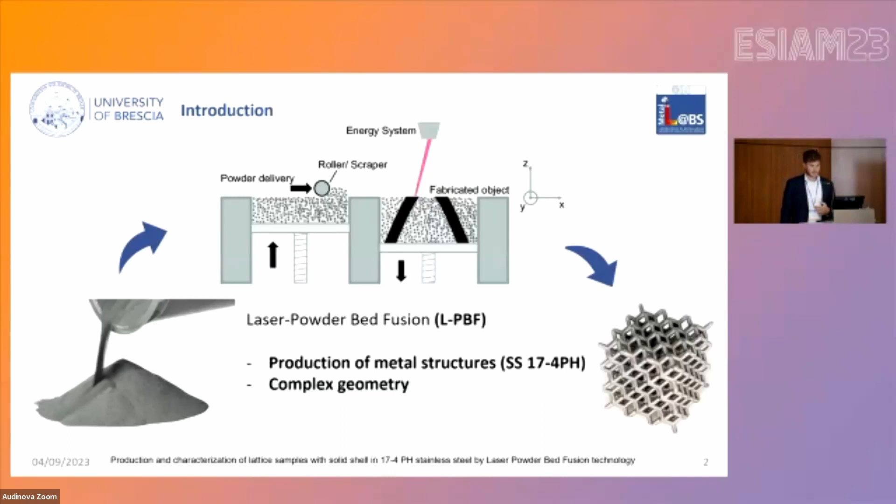This kind of technology is also perfect to build complex geometries such as lattice structures. The lattice structure, in fact, is an interesting solution for several fields: aerospace, biomedical, mechanical, and so on, due to its excellent properties, in particular lightweight, high strength and stiffness, heat dissipation, and shock absorption.

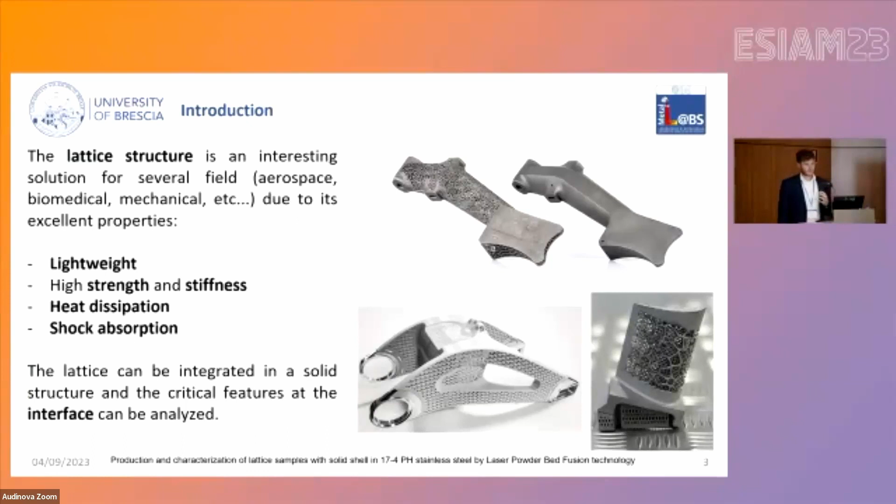But the lattice will be inserted in a solid component, and the key point of my work is to study the interaction between the lattice part and the solid part. So I want to understand what happens at the interface between these two different dense parts. Let's start to see the technology.

We use the ProX 100 by 3D Systems, and we use the process parameters that you can see here in the first table. In particular, we set the power to 100 watts and a scanning speed of 300 millimeters per second. Another important thing is the building chamber, which we fill with nitrogen.

This is really important for the inert atmosphere, not only for the oxidation, but also for the microstructure of the built component, because it's not the only gas that we can use with this kind of technology. The chemical composition of the powder is also reported here in the second table.

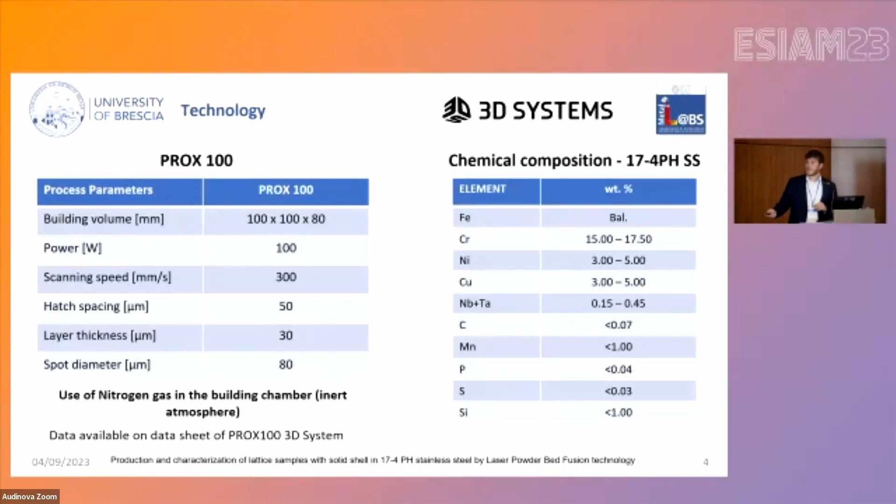For the design of the sample, we decided to print a basic geometry, a square-based sample with a length of 22 millimeters and a height of 20 millimeters, with a shell thickness of 1 millimeter for the solid part. Instead, for the lattice part, we applied an FCC unit cell of 5 millimeters cube in volume, connected with cylindrical struts and with spherical node connections.

After that, we analyzed in particular the microstructure and the defects of heat-treated samples and as-built samples. The treatment was performed as solution treatment plus aging treatment. After that, we also performed the compression test to understand the mechanical characteristics of this element.

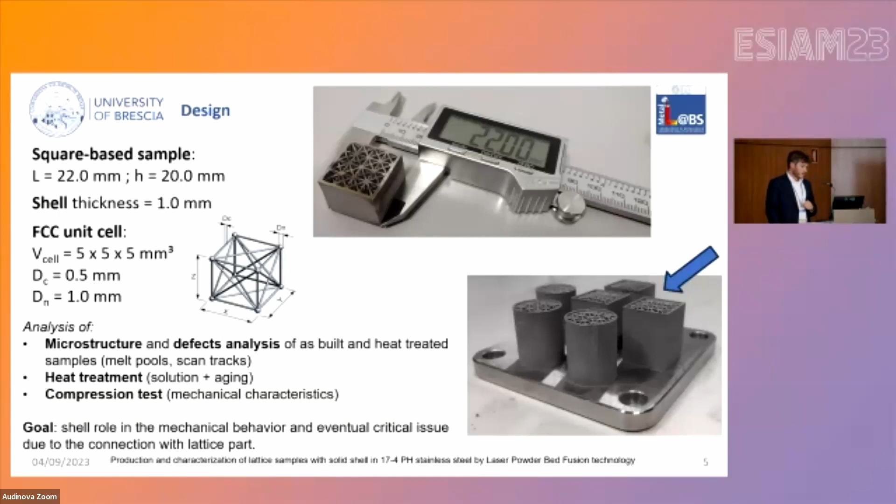The goal, as I said before, was to understand the role of the shell on the mechanical behavior and eventual critical issues at the interface due to the connection of the lattice part to the solid part. Let's start to understand what happened with this interaction. As we said at the beginning, after the production of the sample, we looked for the critical issues.

In particular, the presence of porosity can be noted here and also here, but it is also important to see that we don't have a perfect spherical node here, but a sort of distortion of the geometry. But this is normal because we pass from the small size of the strut to the higher dimension of the solid shell. After this first analysis, we also performed the heat treatment.

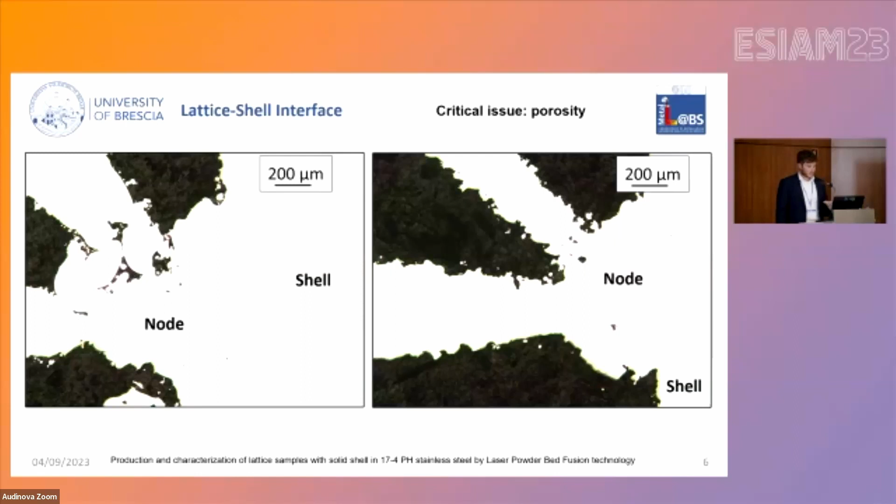The treatment started with a solution treatment at T1 of 1040 degrees for 1 hour, followed by an aging treatment at T2 of 480 degrees for 4 hours. This was conducted in argon atmosphere, including the cooling, to avoid the oxidation of the sample as much as possible.

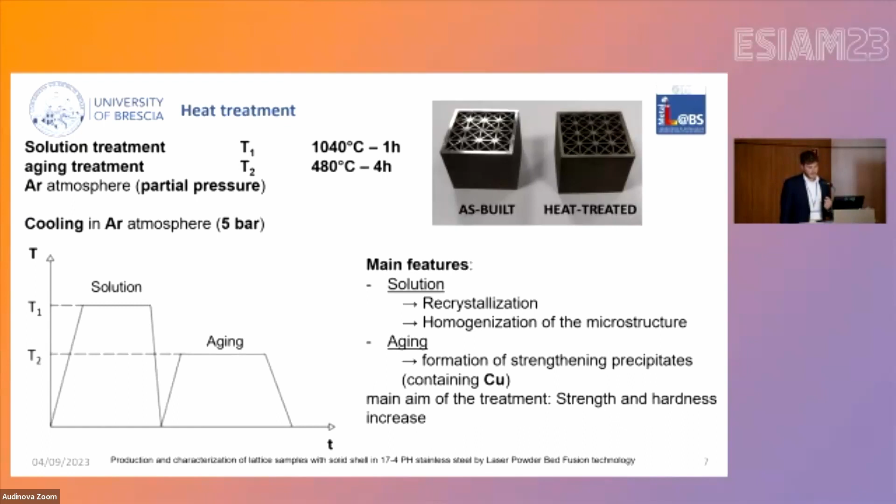The main purpose of the solution treatment was the recrystallization and homogenization of the microstructure, as is widely explained in literature, and of the aging the formation of strengthening precipitates, in particular copper-containing precipitates. The main aim of the treatment was, in fact, to increase strength and hardness. So let's start with the analysis of the microstructure.

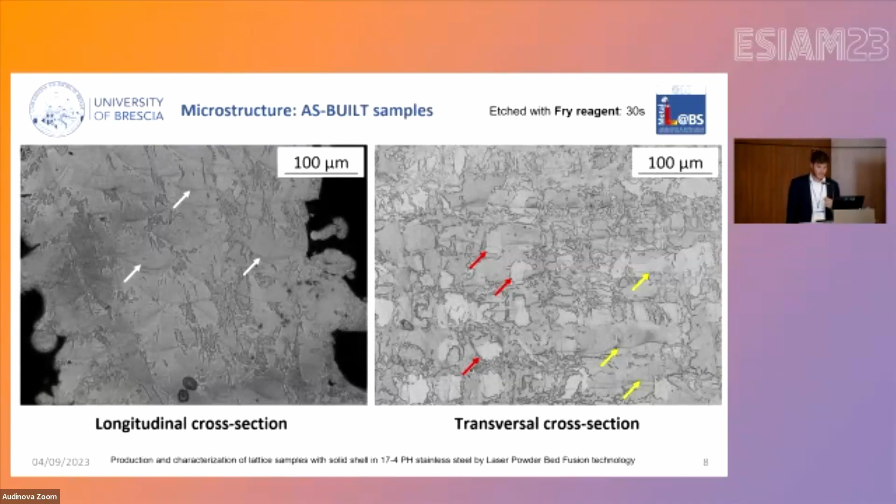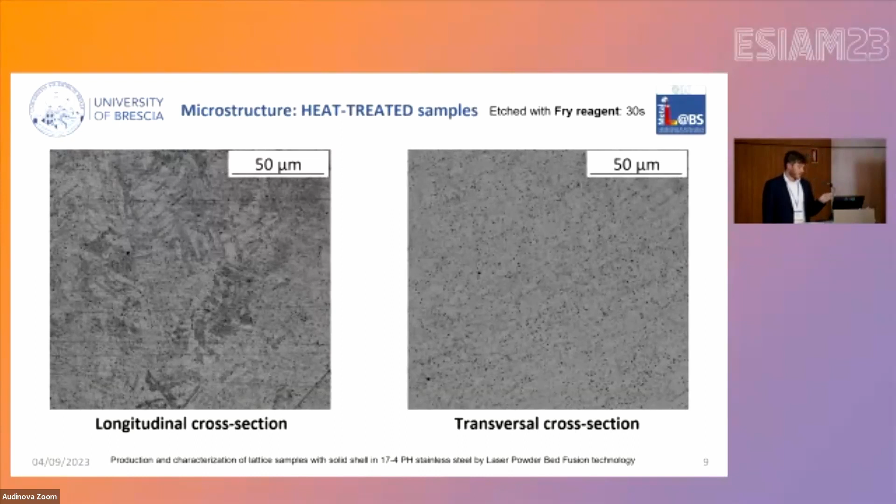After the heat treatment, we obtain another kind of microstructure. In fact, the primary microstructure with melt pools and scan tracks disappears, and precipitates appear that we can find along the grain boundaries and also inside the matrix. We decided to study this microstructure more deeply to understand which components are inside.

In the first picture, for the as-built, we can see three main zones, and we can detect a grain in AB1, a copper segregation in AB2 and the melt pool in AB3. The most important thing I want you to focus on is the copper segregation, because in particular we found this big area deposited on the bottom of the melt pool. This copper segregation is rich in copper. In fact, it presents 24% of copper.

Thanks to the heat treatment, this segregation solubilizes and promotes the nucleation of the copper. In fact, we can find in the second picture copper-rich precipitates. We analyzed, for example, one precipitate on the surface, and we found a higher amount of copper. In fact, we detected more or less 36% copper.

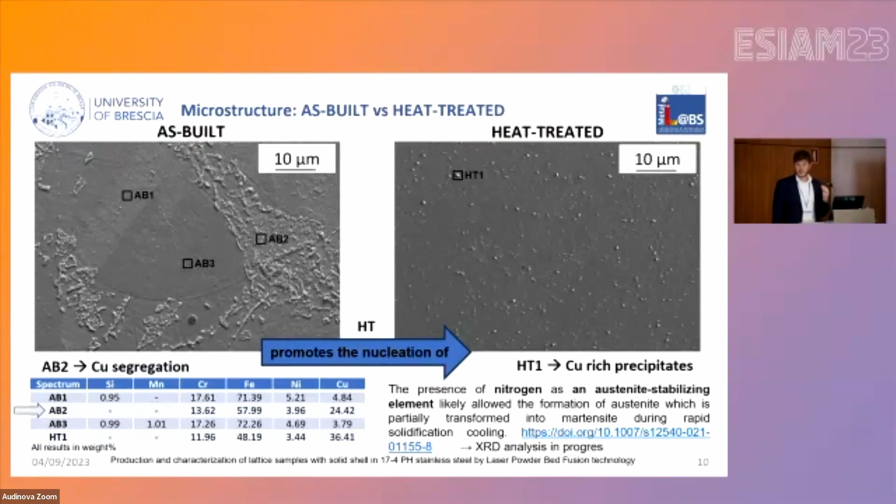Moreover, the presence of nitrogen, as I said before, as an austenite stabilizing element likely allowed the formation of austenite, which is partially transformed into martensite during rapid solidification cooling. And we are also performing the XRD analysis to understand which phases are present.

At the end, I also performed the mechanical characterization. We performed compression tests on the as-built and heat-treated samples, three for each kind of sample. We can appreciate that the two curves are different, because for the as-built we have a lower value of stress, and there is a sort of plateau when it reaches the peak of stress. While for the heat treatment, we obtain a higher strength, of course, and not a plateau, but a decrease in strength.

But the very important thing in this study was the deformation, because in this case we obtain a deformation of the shell that follows the compression. So we don't obtain a detachment of the shell like I obtained in another study for the titanium sample, as you can see in this picture, because there we applied the same compression test, but the lattice, the internal structure, expanded in the external direction and detached the solid shell from the structure. Instead, in the case of 17-4 PH, we obtain a deformation of the shell.

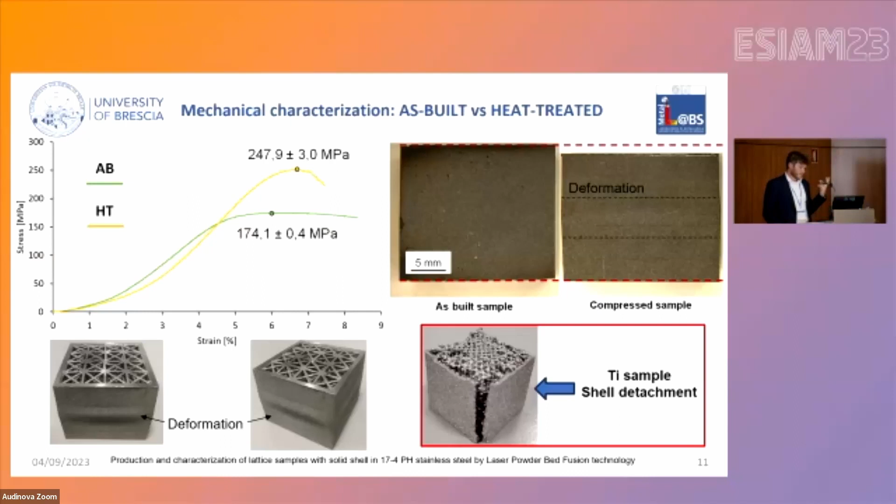And so we understand that we can use the 17-4 PH with higher load and, for example, this titanium for lower load, and for different applications. For example, 17-4 PH can probably be used for shock absorption.

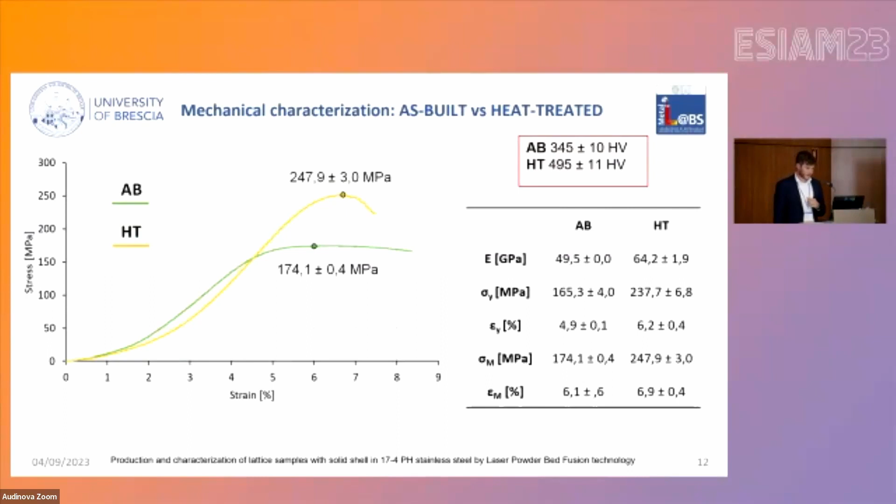Moreover, I also detected the hardness of the component. We performed micro Vickers hardness to understand if we effectively have an increase of hardness. And in fact, we detected an increase in hardness for the heat-treated sample. This is probably due to the transformation of the microstructure, and also the presence of precipitates. I also collected mechanical results about the Young's modulus, yield strength, and ultimate strength, and we found an increase of the resistance and also of the hardness.

At the end of this work, I concluded with some considerations. The nitrogen fabrication atmosphere, as I said before, is a good austenite stabilizer, and so influences the microstructure of the as-built sample, generating the copper-rich segregation. Grain recrystallization occurred during the heat treatment, as well as strength and hardness increase, and the formation of strengthening precipitates containing copper.

From the compression test, defects were detected at the interface, such as porosity and geometrical size, in particular at the nodes and close to the connection between the two different dense parts. The critical issue was detected at the interface, but not enough to detach the shell from the internal lattice. So we obtain a good deformation of the shell that follows the compression. The detachment of the shell from the inner lattice did not occur, and the shell follows the collapse of the internal lattice structure, typical of this material, unlike another study I presented for the titanium-based alloy.

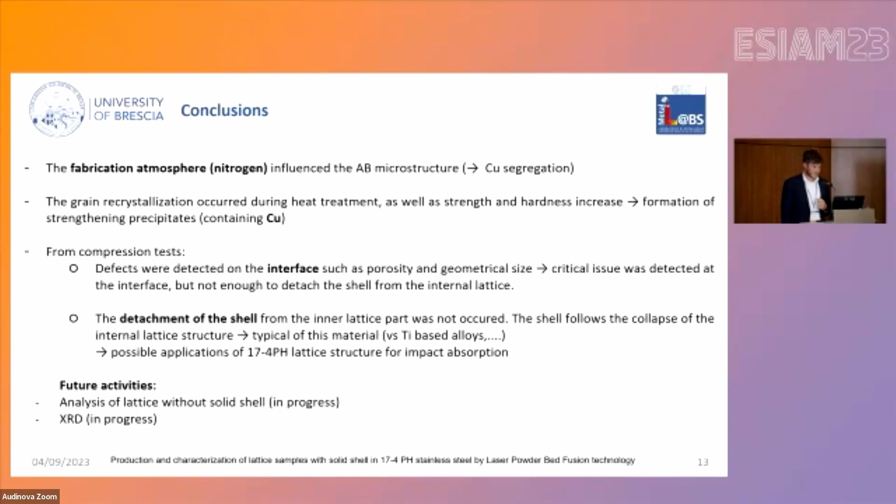A possible application of 17-4 PH lattice structures is impact absorption, given the classical deformation of the shell that we can see. As future activity, I want to understand the behavior of the lattice in this alloy without a solid part, analyzing the lattice without solid shell to understand what happens, and perform the XRD analysis to understand if there is more austenite or martensite on the surface of the samples. Thank you for your attention.